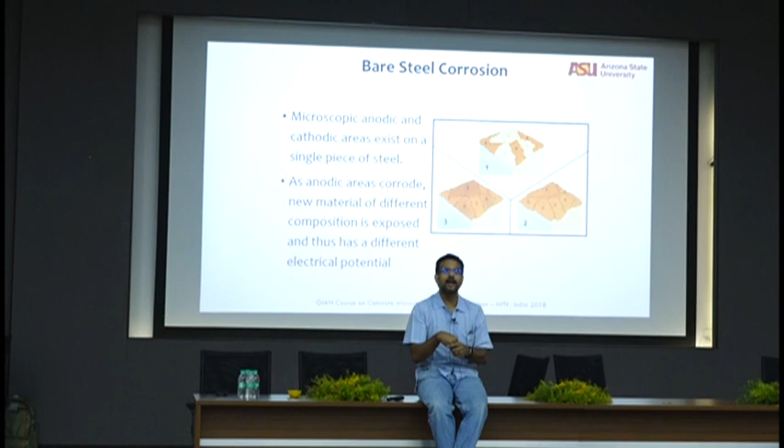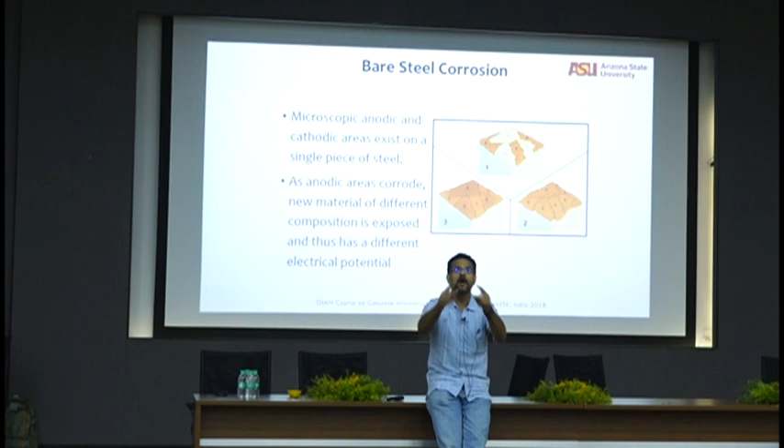Now, have all the wonderful technologies in the world implemented in a building. You can have wonderful waterproofing, integral waterproofing admixtures thrown in. You can have the best epoxy to coat steel. You can have the best surface treatment primer on your concrete column surface. But if water drains through the concrete column with 400 millimeters or 4000 millimeters of rain that you get in Mangalore, you can calculate over the surface area of concrete with all these, what does 4000 millimeters of rain mean?

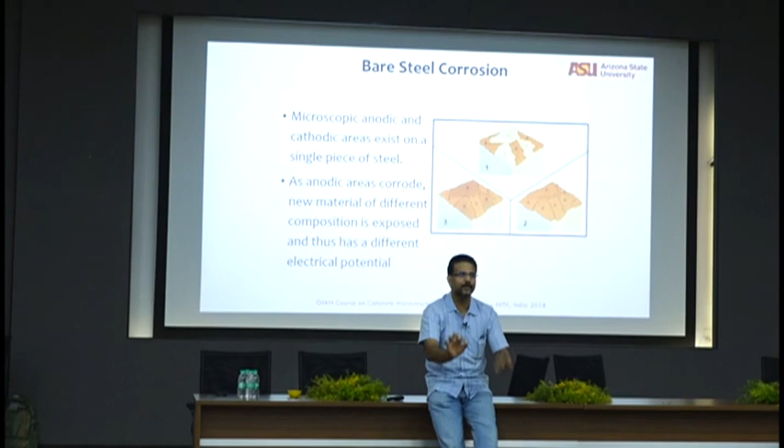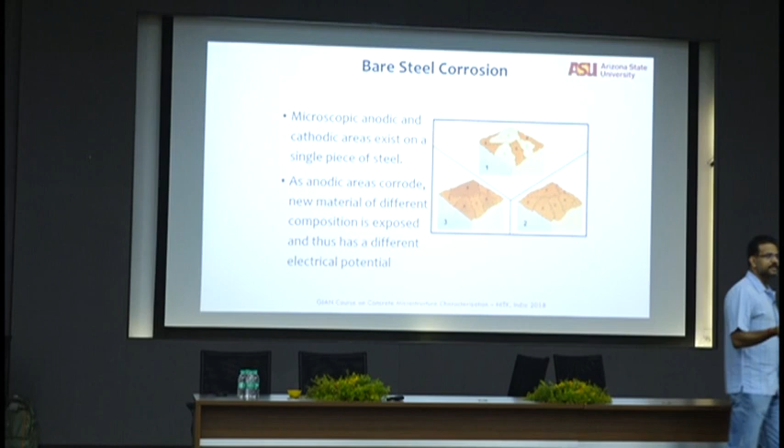I've given you all the equations for sorptivity and diffusion. You can sit down, make a simple calculation and tell me within 2 years how deep the water has penetrated. So it's not about the science of it, it's about the policy and the procedure of it.

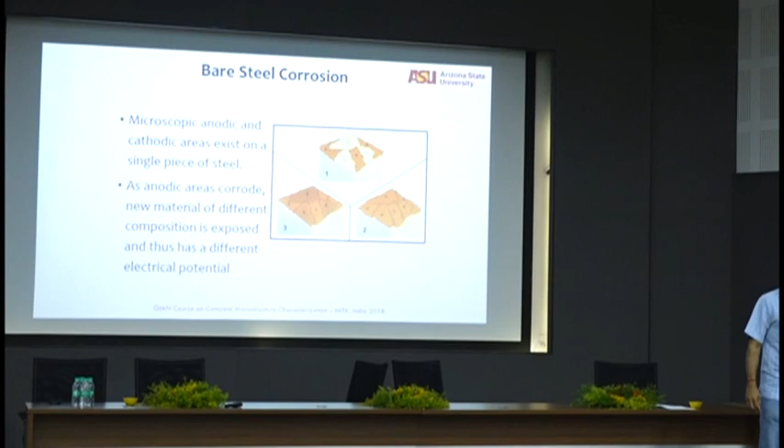Corrosion is an eminently controllable problem. When I say controllable, controllable for 50 years, not for life. Is that not enough? If your propagation time is 25-30 years, and by the time your rebar is only about 70% of what you initially put in, you think you should start changing it, if you get 50 years, is that not good enough?

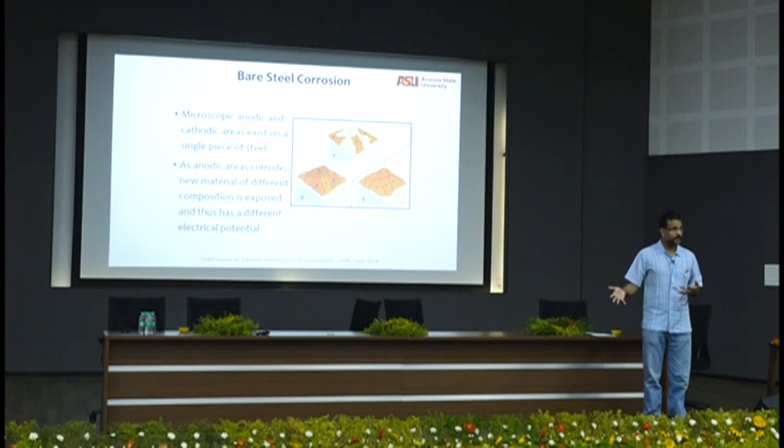In general structure - I told you about the nuclear reactor containment concrete that was supposed to last for 1000 years. Again, for those you have to do all the things over and above. Here, to control corrosion, it's very, very simple.

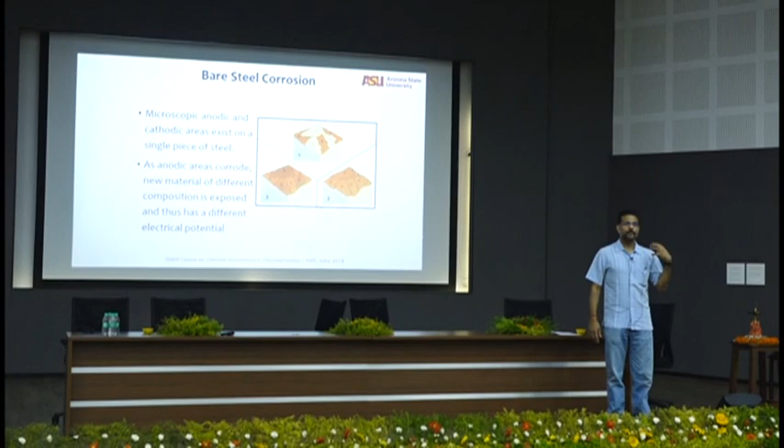When my house in Kerala was being built, I was doing my civil engineering, and the engineer doing it was a very good friend of ours. I had interest in concrete at that time, so I told him I'll help you, I want to know what that is. We still had the 1:1.5:3 concrete mixed by hand. This was 1992, so 26 years.

We didn't have to apply waterproofing compound on our roof, and there is absolutely no leak inside. And I'll tell you, at that time for low cost construction we were all big on Laurie Baker style - hollow slab fillers.

I even wrote two papers on filler slabs with mangalore pattern tiles, where you can space the reinforcement out and put in the tiles. You've seen that, where you put mangalore pattern tiles in the roof so you don't plaster, you see the roof from underneath. This is Laurie Baker's style.

So we did that, so the reinforcement is much lower in my house compared to what we do now. Not a single leak, not a single point where I can see brown discoloration from corrosion. Who did it? The local guy. 1:1.5:3 concrete mixed by hand - it's working wonderfully well.

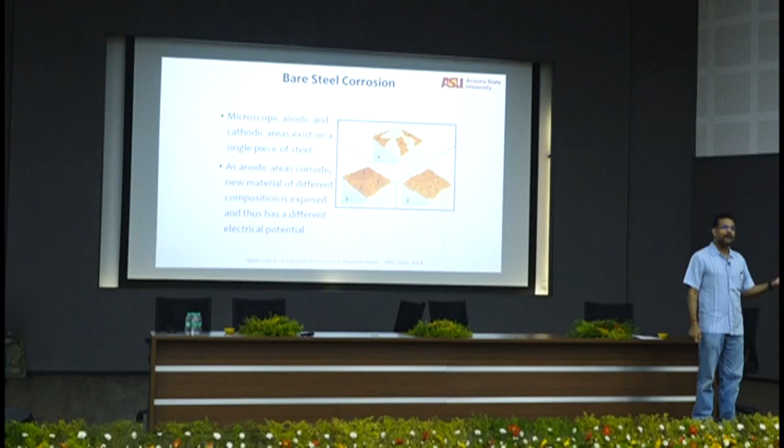So when somebody says it can't be done, I say no, absolutely it can be done. It has been done. Now also think about it - it has been done, we've had structures.

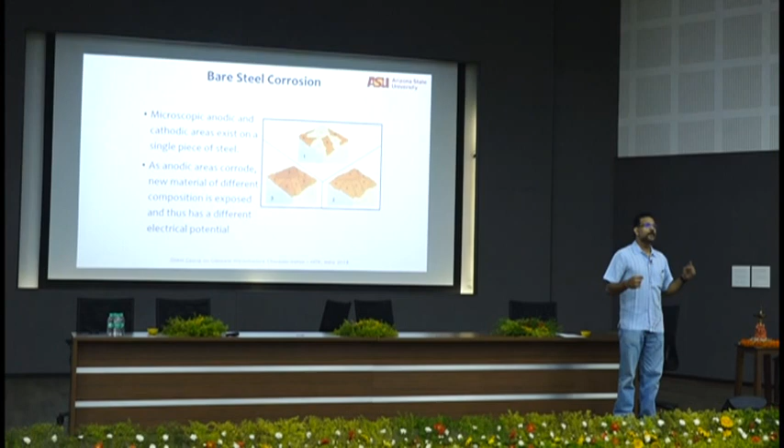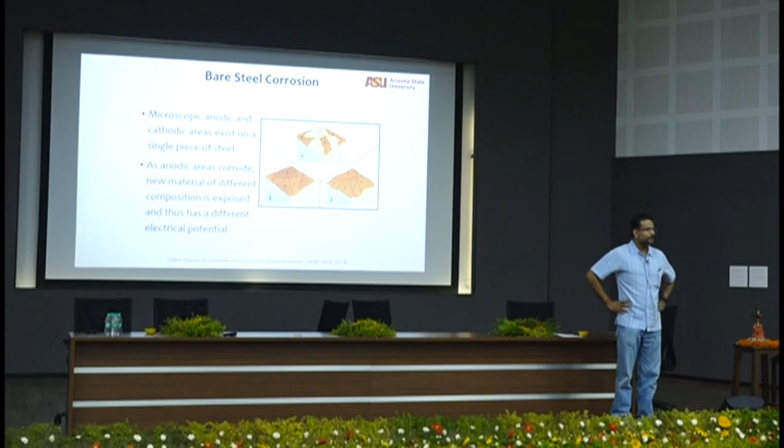There was a bridge in my hometown which was built - a very narrow bridge, so they had to demolish it to make it wider. It was a narrow concrete bridge built in the 1920s, popping off and all of that. And they could not break the bridge with a jackhammer - they had to explode it. A 1920 bridge - you can do it. People have done it.

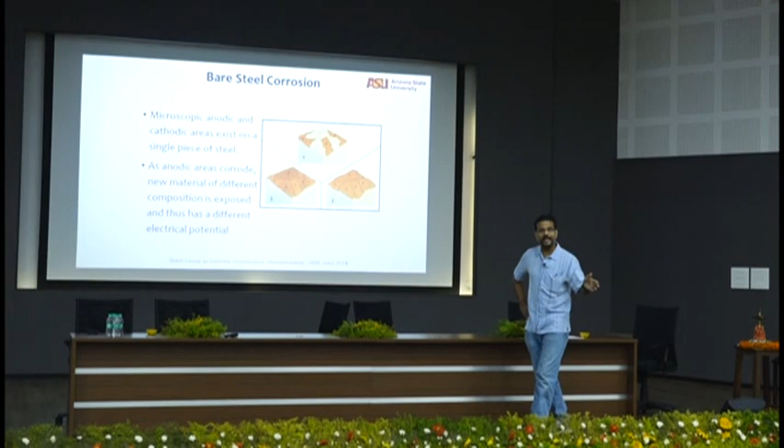So a lot of times we create the problem ourselves. Corrosion, in a lot of these cases, is a problem that we have created. And sometimes the problem we created is like the gas that comes out of the pot, and then that gas becomes a problem - we let it out, and now it has become a problem.

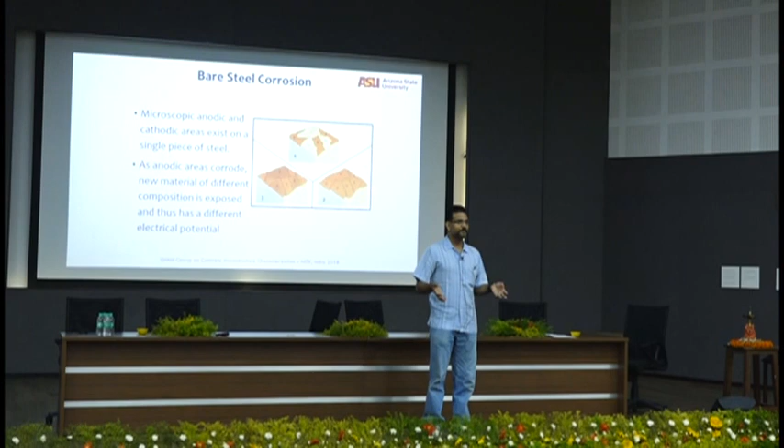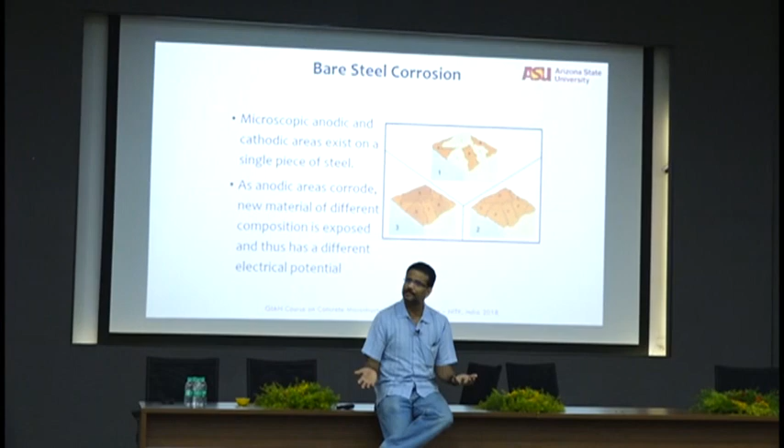There's a lot of corrosion that we have, and I'll still go through the details so we can cover the theory. But I want to make sure that the majority of concrete corrosion we see - when somebody comes and lectures about corrosion, electrochemistry and all that, it's all great, but until you control what you can control in the best way, everything else is going to be lip service. These are all academic, intellectual understanding.

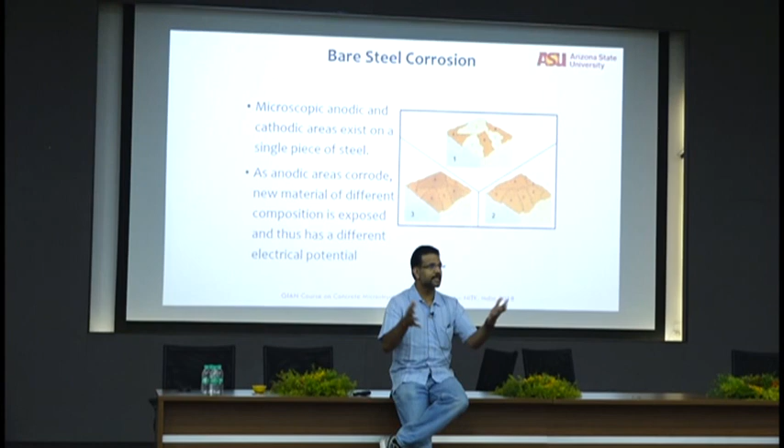Somebody should tell the architect who designs all the buildings here in NIT, please don't give me Bangalore designs, give me a Mangalore design, because these are all Bangalore designs. Bangalore doesn't get this much rain. So probably the architect, the CPWD architect or whoever is doing it, is sitting in Bangalore, taking designs he uses elsewhere.

And you have these flat boxes where water falls right through the sides. A little bit of sunshade, a little extension to the ends, and a way with a few PVC pipes to take the water away, drain the ground towards different sides, take the water away - your foundation is safe, your roof is safe, your wall is safe, your structure is much easier.

How much does it add to the initial cost? Maybe another 1-2% of the initial cost. If all these walls, concrete and roofs get corroded, in 10 years how much are you going to spend upkeeping them?

20, 30 years, right? And the other important thing: whenever you see structures, if they are concrete, they are not supposed to be growing trees. Concrete has a lot of minerals, but those are not minerals for trees. There are other places for trees. There should be other places for trees. Trees are not... so actually walk in the campus.

Walk in the campus and see how many sunshades and wall sides have sewage pipes coming from the building. You see trees and creepers growing up as if these are supports for them, creeping through. When the creepers grow, they have to attach themselves, they get the roots, and the roots are very powerful. They penetrate through the mortar because concrete is a very porous material. So they penetrate through, the roots start holding them, they expand, more water goes in, and then we say, how can this go wrong? We did it only 2 years ago.

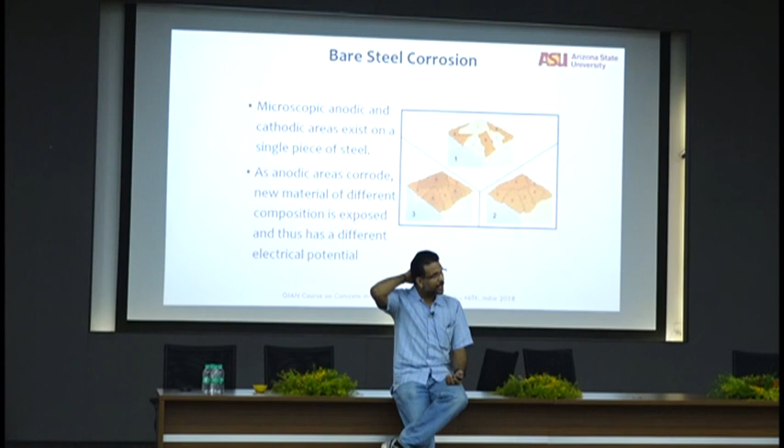If we get old, don't we go to a doctor for yearly checkups? At least when you feel sick, wouldn't you go to a doctor? Doesn't matter what kind of doctor - allopathy, homeopathy, Unani, whatever medicine you can go. But you still will consult some expert, you still will go to somebody who you believe, who you trust. Buildings also want that. They also want some kind of maintenance, some kind of upkeep, so that these issues don't happen. So now, assuming all these are taken care of, let's talk about what happens.

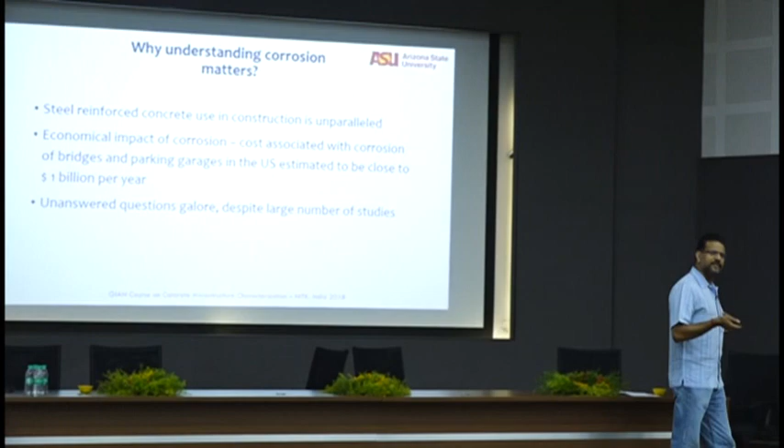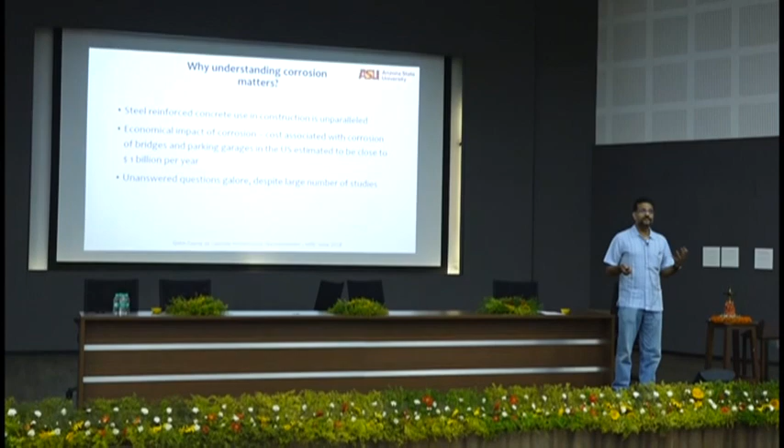Again, this is not an India problem, every country has the problem. The US also has a lot of corrosion damage. The only difference is the structures we speak of there having corrosion damage have been in service for 50 or 100 years. They've been there for 50 years, and we're talking about repairing and rehabilitating those structures because we cannot afford to tear them down.

Think about the New York subway system, with all these trains going through 24/7, 365 days without a stop. I cannot shut the New York subway down and tell people to find another mode of transportation - the city will die. You will have billions and billions of dollars of loss in a single day. You can't afford to do that, right? So you do all this. And the New York subway system has been there for 50 or 60 years.

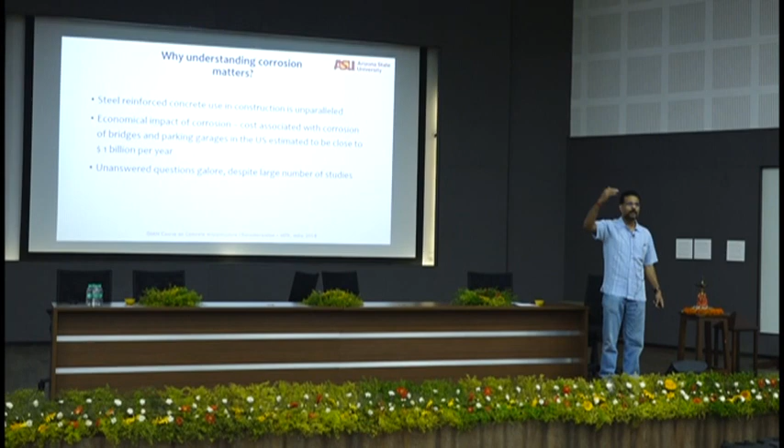Now there's a lot of corrosion problem on the roof and stuff, but they never talk about it 10 years from when it started. 50 years is reasonable, you can assume, and then they're trying to fix it stage by stage because you have roads around, water will seep in and all that. But it's 50 years, 30 years, yes, but not in 4 or 5 years.

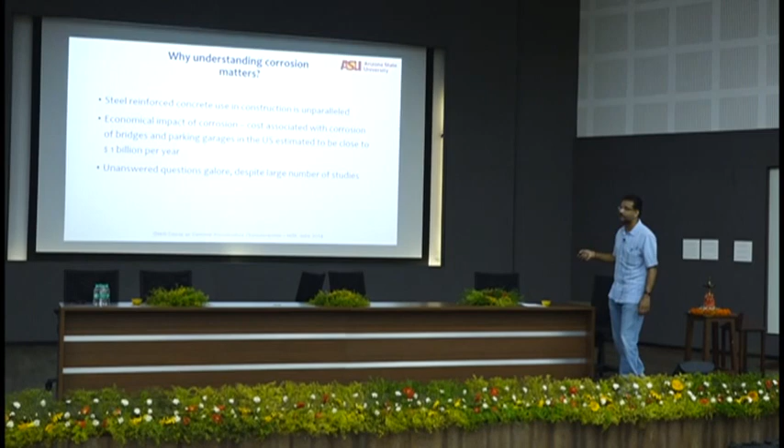So $1 billion per year is the economic impact of corrosion just with bridges and parking garages in the US - this is probably an old number, it might be even higher. Bridges and parking garages - why those? Any idea? Bridges you put in deicing salt. Parking garages during snow time, all the roads and bridges will have all this salt. You drive through this salt, you come and park your car in the parking garage, and you go to work.

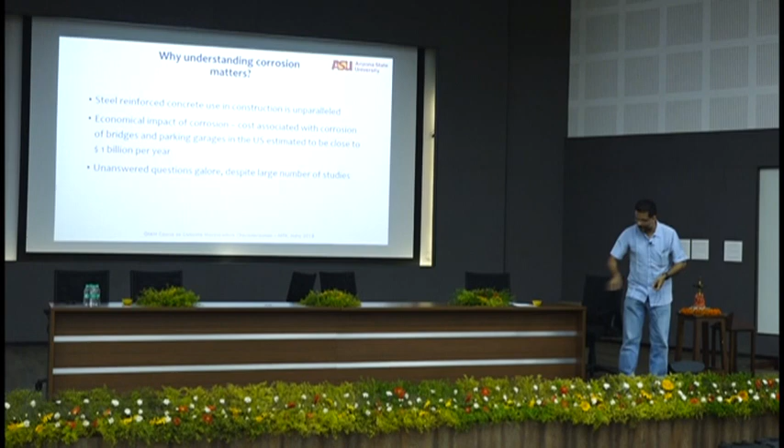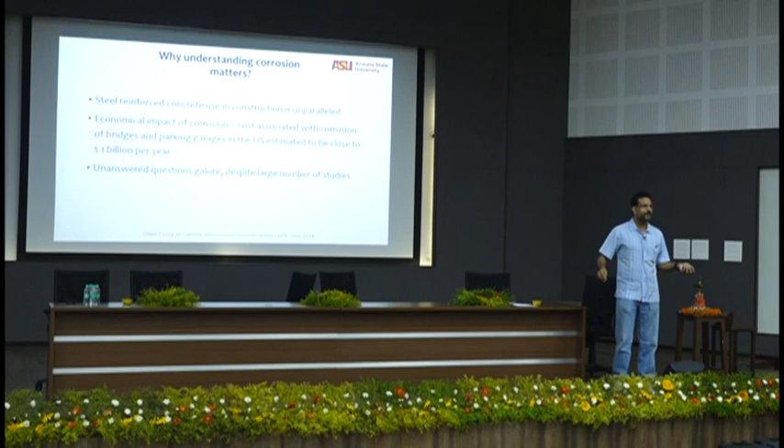Parking garage is warmer than outside because it's enclosed. The ice and snow on the undercarriage of the car will start to melt and drop. So you will see localized pockets of corrosion on the floor slab, and they'll do precast prestressed slabs with nice anti-corrosion coverings, but still you will have that. So bridges and parking garages are prime candidates of corrosion - you have plenty of that.

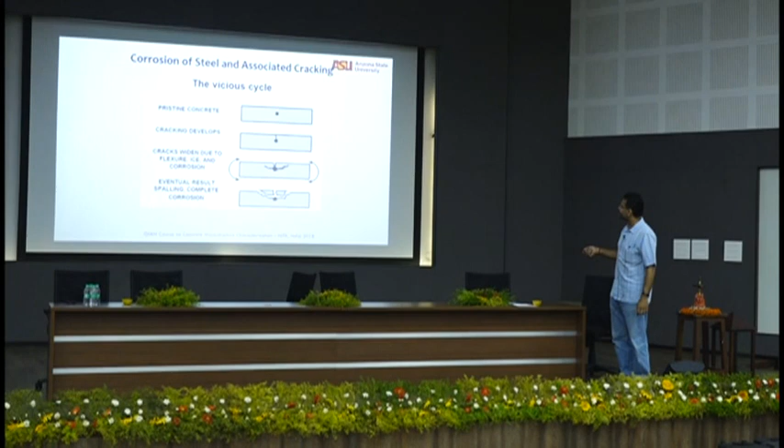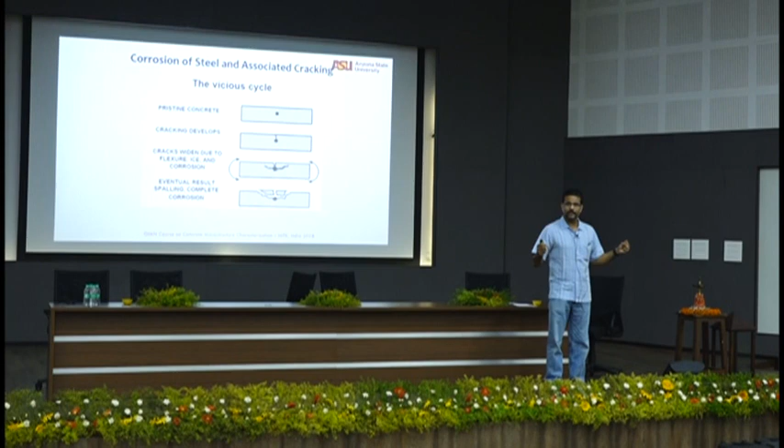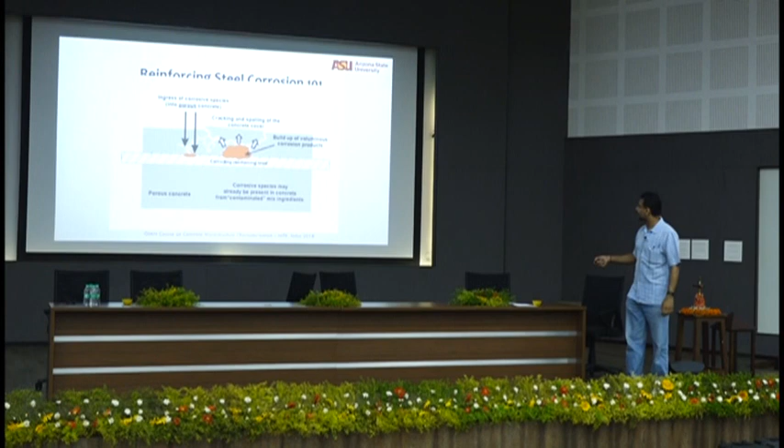Simple idea: pristine concrete, the crack widens, moisture goes through. When steel expands, how many times the initial volume? 6 to 7 times the initial volume. When something inside concrete wants to expand, what stresses is it exerting in the concrete? Tensile stresses. Concrete has no tensile capacity, therefore it will crack. Cracking will continue until you have spalling, delamination, all of that, and corrosion products will go on.

The anode cathode story, all of you know that. It's a chicken and egg problem - did cracking cause corrosion or corrosion cause cracking? We can always debate about that forever, but it doesn't really help anybody find out what caused the problem. You have to fix the problem, both are issues. About 6 to 7 times the final volume, the initial volume of iron through all the oxidation processes gets you about 6 to 7 times volume increase. Corrosion will not occur if no water is available in concrete.

There is some water in concrete already. Can you avoid that water? We talked about pore solution water. That water is available in these very small channels - the cement is already trying to use that water. That water is not really making the sample corrode. But when you get massive water supply from outside, that is what causes corrosion.

Humidity, like water, is important. You need oxygen, you need the right kind of species.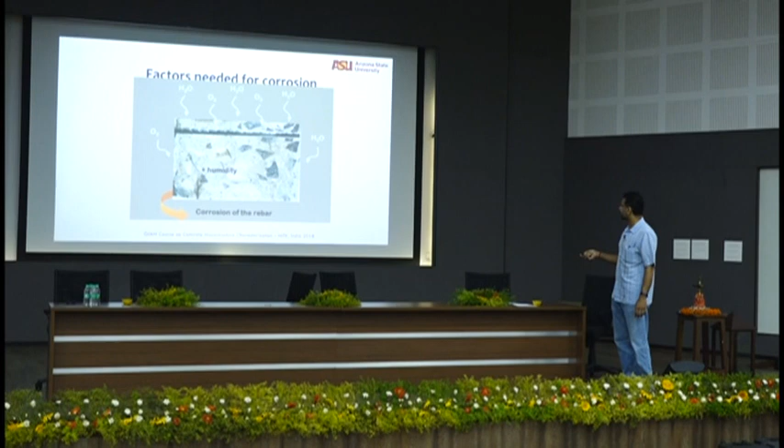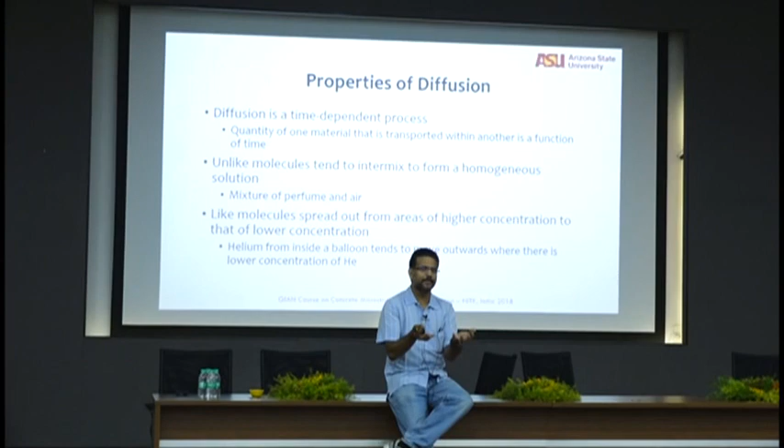Now we talk about moisture going in. There are several ways in which moisture can go in - I talked about transport yesterday. It can be absorbed, it can be adsorbed, a combination of both that we talked about. It can diffuse, it can permeate, it can wick under the action of pressure, under the action of the pressure difference. All these are ways in which it can move.

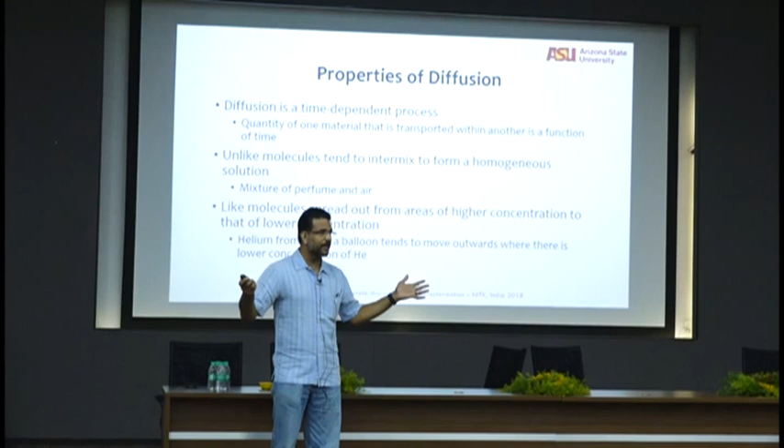Now when you talk about concrete corrosion, if you look at papers on corrosion of concrete, what is the mechanism everybody focuses on? Diffusion. You would have seen Fick's second law used as the standard expression of how moisture transports through concrete to cause corrosion. Why diffusion? Why not permeation? I gave you the reason yesterday, if you remember.

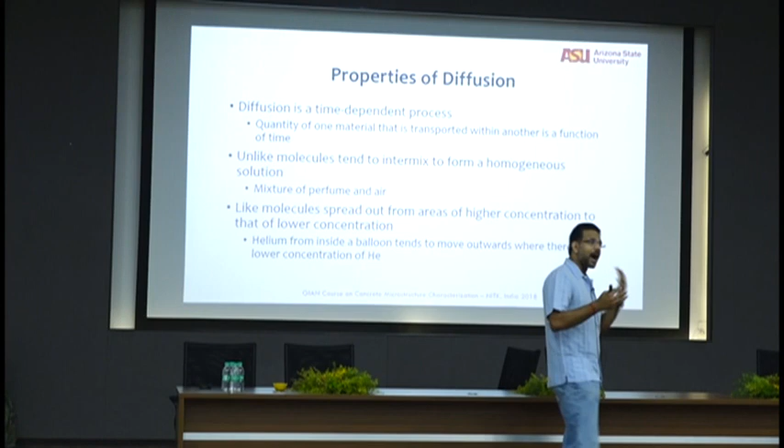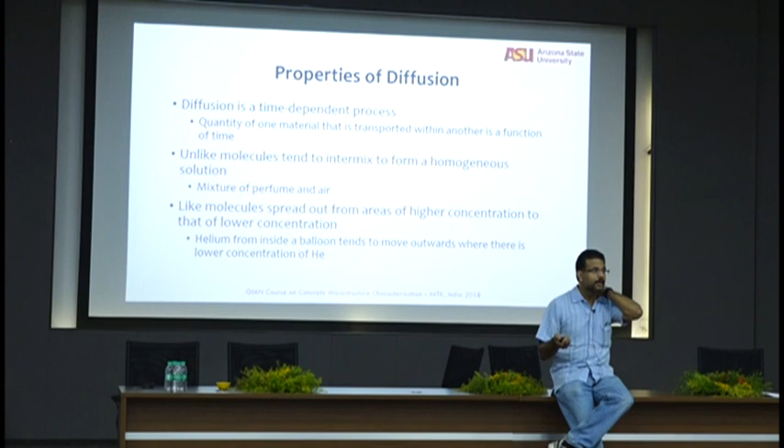Permeation happens through the larger force, under gravity. Sorption we talked about - that's the first 2-3 millimeters of concrete or cover depth. But after that, once you have saturation, the transport is extremely slow. That slow process is diffusion. Therefore every theory of concrete corrosion talks about the mechanism of corrosion being diffusion - but that is not true if you have a really porous, ugly concrete.

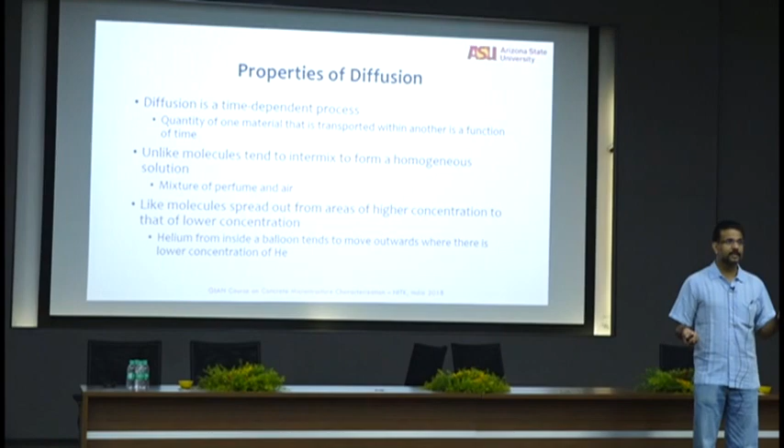Diffusion is a function of concentration gradients, right? So diffusion is very fast when you have a higher concentration at one side and a lower concentration at the other side.

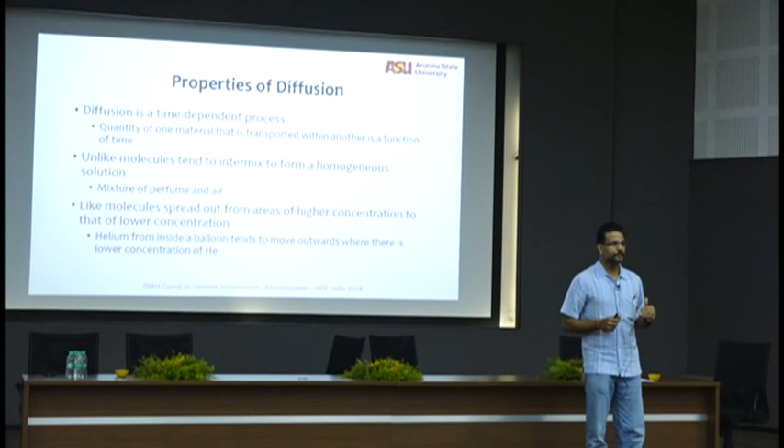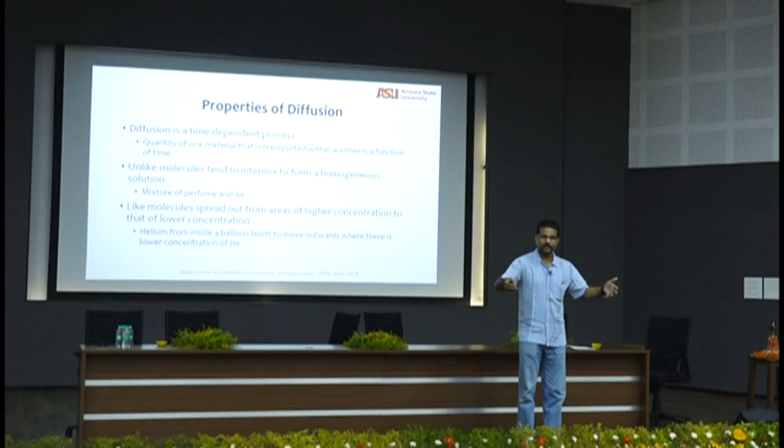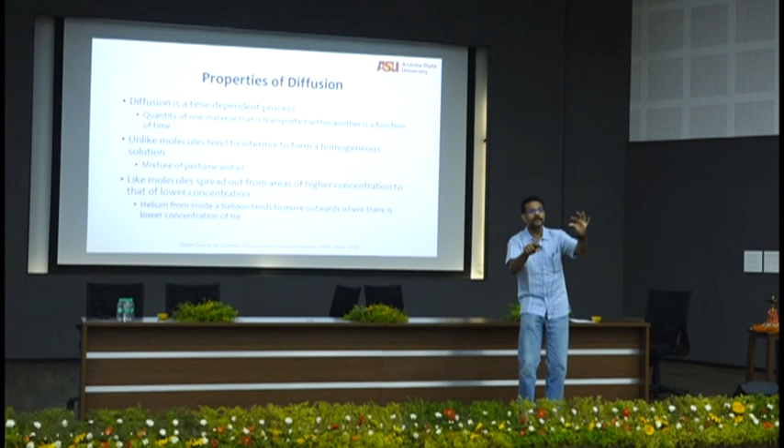Now think about a structure, say a roof that is ponded with water - standing water with no way to go. Because of sorption and other processes, the top little layer gets saturated fast. Once that layer is saturated, the concentration difference between this and that is much lower, because this is saturated and the top is also saturated. Then the entire head of water wants to go below that, so the next layer gets saturated quickly. Now it has a much higher head, so the whole thing wants to go further. See how quickly the process goes? You get to your steel in no time.

How much cover do you give - 50 mm? 75 mm? You get to your steel cover in no time, especially with porous concrete, when you don't have very good concrete and you have standing water. So think about when water slides through all these columns, you get very high saturation.

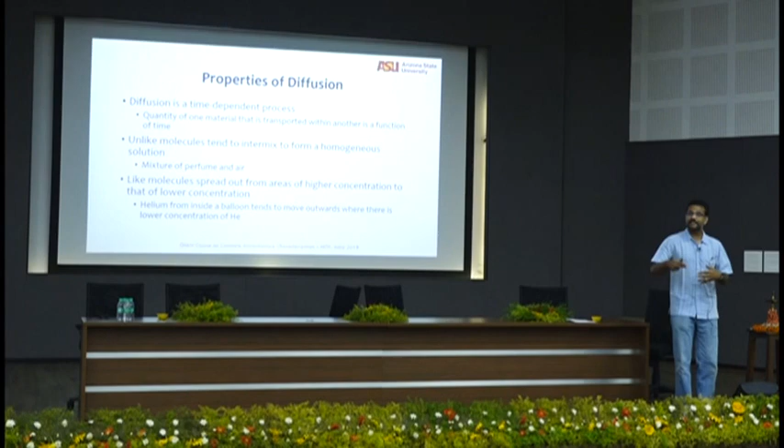Yesterday I told you about relative humidity. Inside, the surface layers - if you leave it in an environment with 45 or 50% RH, it takes 25 years to dry out. That relative humidity is already inside. Then you subject it to a lot of relative humidity outside, so your concentration gradients become narrower, which means the process goes faster - higher and higher concentrations let it move faster and faster. Get the idea? That's what's happening with diffusion.

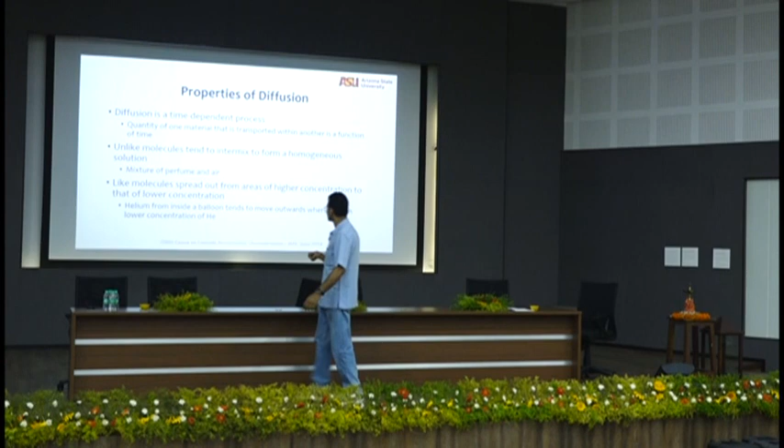If you want examples - perfume mixing with air, a helium balloon, all that.

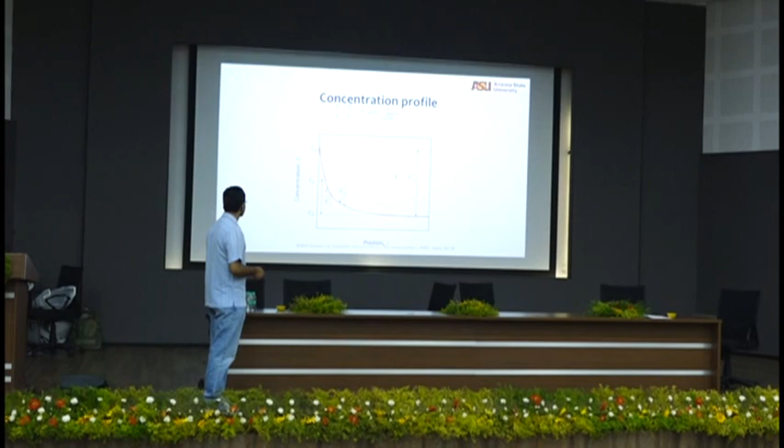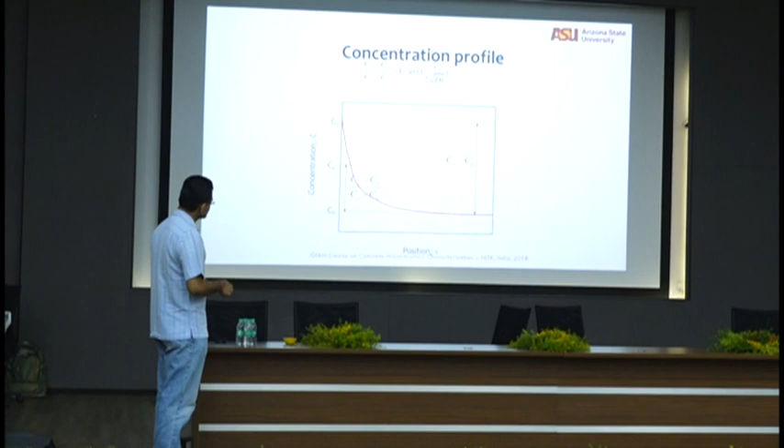I'll skip the math behind it and just show you the final concentration - this is concentration with respect to position. Think about moisture: very high concentration of moisture at the top. Assuming this is an example, assuming I have this much moisture inside, C naught is my concentration of water in the concrete. This is the trend that this line will take.

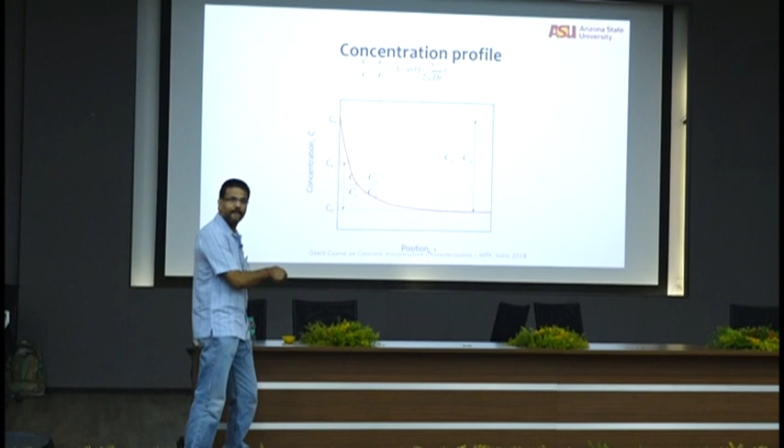Now what happens if I have a very high concentration of water inside concrete because it's very porous? As this goes higher and higher, this line with position will go faster and faster to where it has to reach, meaning you get higher concentrations at any position faster. The more you push this, the line reaches a deeper position faster. So that's a simple reason why higher porosity means faster corrosion.

Let's take the second law to solve this. Corrosion is influenced by pore solution. Now we come to more academic sort of stuff.

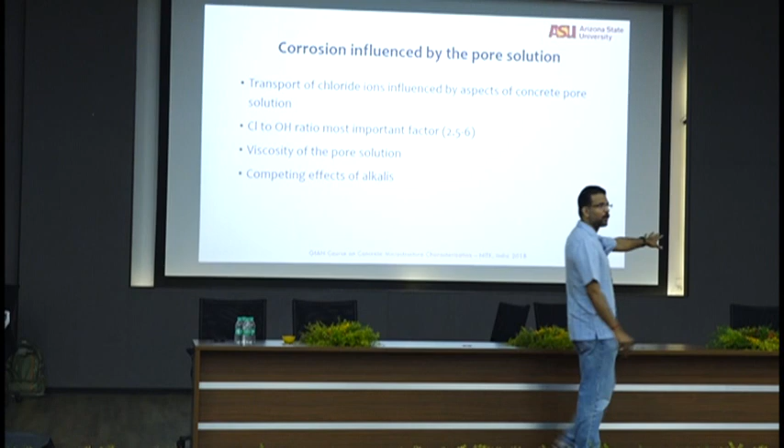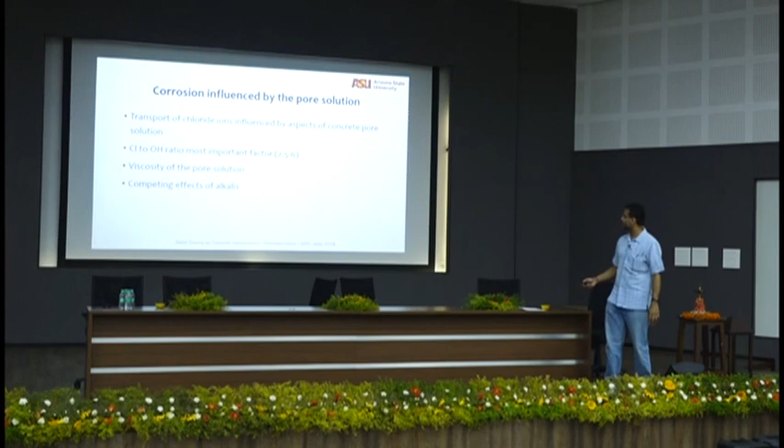Having taken care of all the other factors—knowing that I have good concrete, knowing that I have taken care of it well, knowing that the conditions are favorable for corrosion not to happen—then the transport is influenced by aspects of pore solution, whether it's chlorides or moisture.

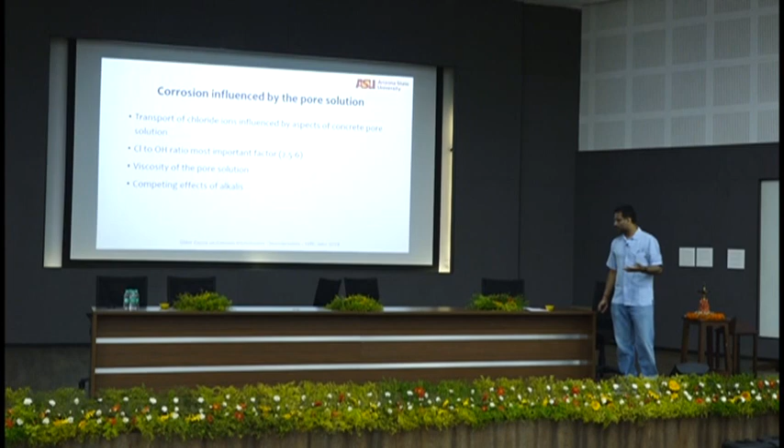Now, most of the time, where does chloride come from in India, in places where you don't put salt? From pore solutions, from areas where your atmosphere is chloride-laden because of the ocean. So this is a coastal problem. Is there chloride in concrete in areas of India where there are no oceans? Can you get chlorides in concrete when you don't have an ocean nearby? Yes. From where?

You might have some adulterated sand with chloride. What's the other thing? If you read from admixtures, from chloride-containing admixtures—normally you specify admixtures that don't contain chlorides, but there are some chlorides, especially if you use an accelerator, you may have chlorides in the accelerator. There's one more place chlorides come from: water. Cements are very good, cements have no chlorides, very very negligible. But water, you may have chlorides in water. So that also is a possibility.

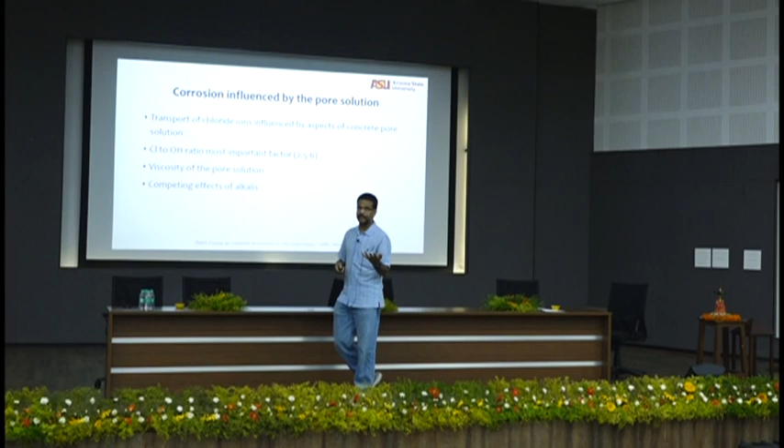But let's ignore that and just assume this is a problem only in coastal areas, because the rest are all controlled—I can't tell the ocean not to have chlorides, so that's a losing cause. But you can afford not to use chloride-contaminated water, admixtures, or sand. So let's assume it's coastal areas. There you have chlorides in the moisture in the atmosphere, and when there is very high humidity, when transport happens, chlorides also go in through the concrete.

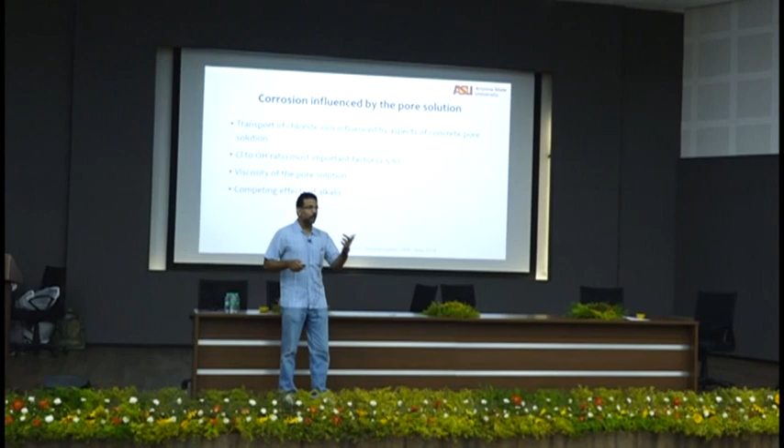Now, I told you yesterday when we were talking about the rapid chloride permeability test, what are the two dominant negative ions in such concretes? Chlorides and hydroxides. Therefore, they are fighting with each other.

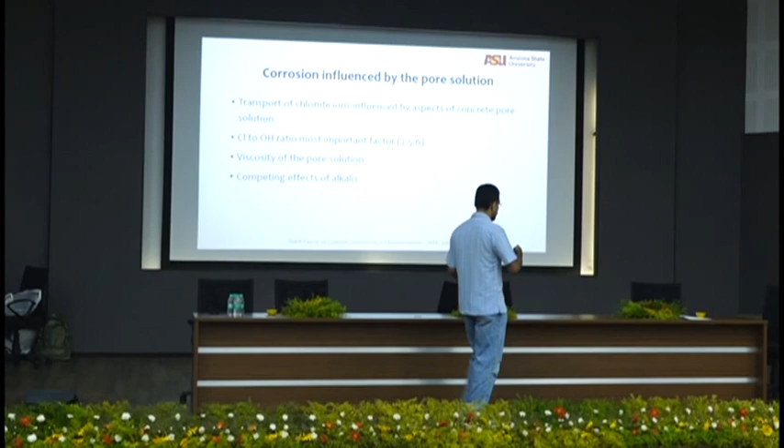Any material wants to be electroneutral, because electroneutrality is a lower state of energy. Ionization—sodium chloride becoming Na-plus and Cl-minus—requires you to supply energy. The moment you take the energy off, they'll go back to NaCl, because that's a lower state of energy.

So when you have chloride ions and hydroxide ions, you have an imbalance because you have a higher amount of negative charge. So they are trying to maintain a chloride-to-hydroxide ratio. I have a certain amount of hydroxides already in my system, and then how much chlorides can go in to create balance—also remember, chlorides have to go in towards the steel.

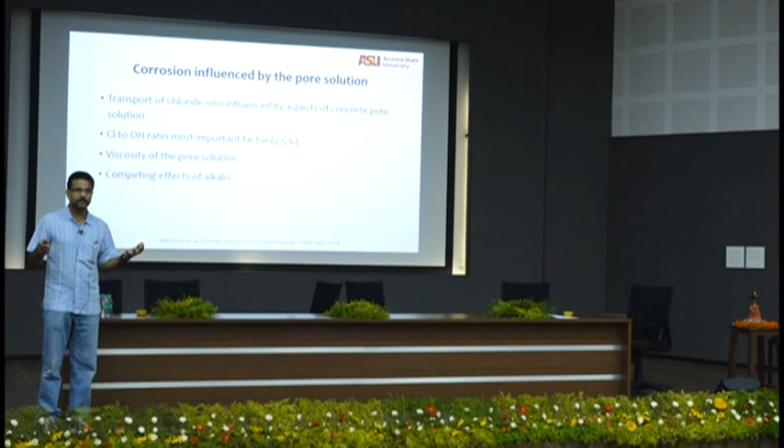Negative ions are going in a certain direction. Hydroxyl ions, if there is a slight electric current and that dictates the direction, hydroxides also want to go in that direction. Have you heard of the impressed current method of protecting concrete structures, where you apply a current opposite to the direction of the front? It's based on this principle, because these ions want to go in one direction.

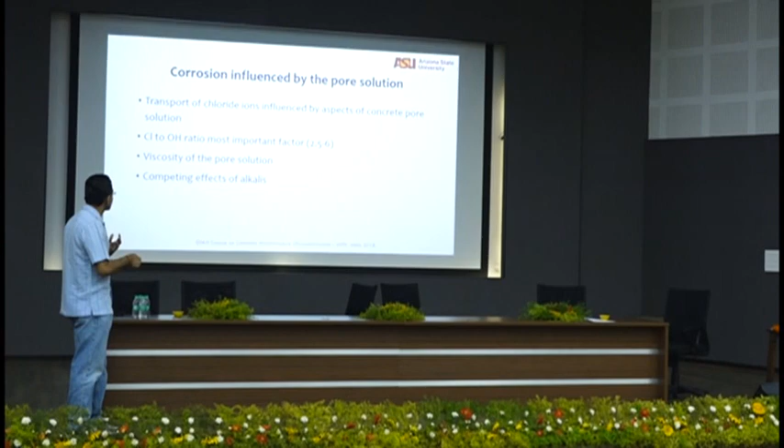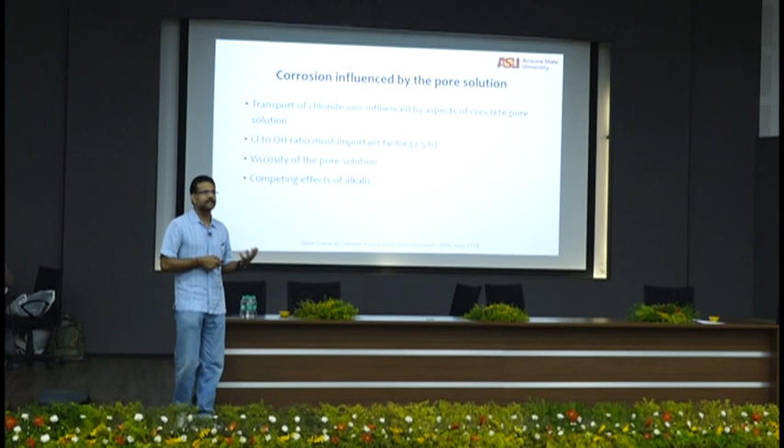So you want to manage the chloride-to-hydroxyl ratio at 2.5 to 6. For every chloride, 2.5 to 6 times the amount of hydroxides is typically the ratio, below which you think you will have corrosion problems.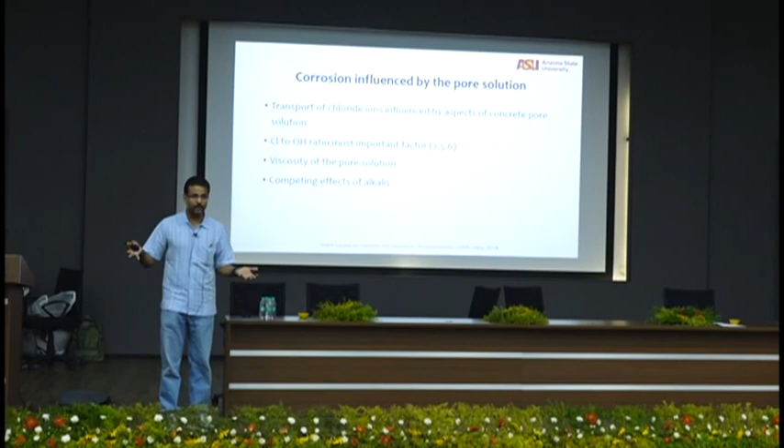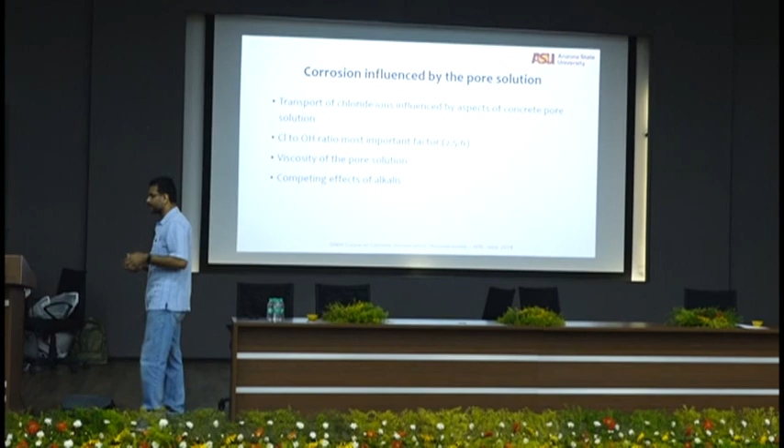Viscosity of the pore solution—remember I talked about swimming in honey versus swimming in water? Chlorides will find it harder to swim in a very viscous pore solution. So if you increase the viscosity of the pore solution—admixtures, there are some companies trying to create some—but like I said, it's become very expensive. There could be, again, an area of research that somebody can do.

Typically, if you can develop low-cost admixtures from some local source—a lot of people are thinking about different plant extracts to put in concrete. You might find, and I don't know, I'm not a big fan of that anyway, but you might find some plant extracts useful for such applications.